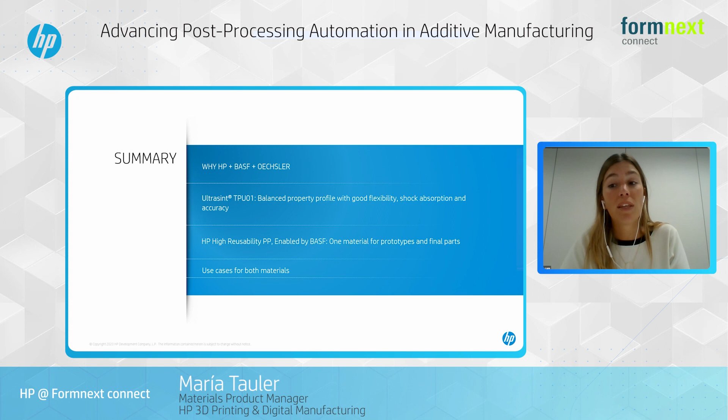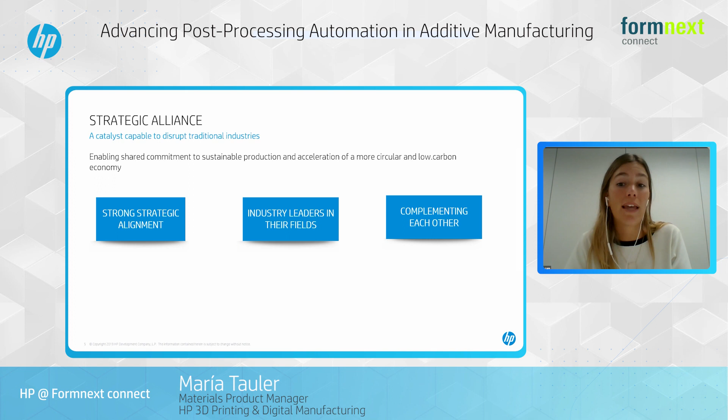So let's just start on the strategic alliance. And today we wanted to share a little bit why these three companies together and what will bring. So the three companies have a strong strategic alignment. They share the same vision to disrupt the industry, and they share the same application focus, especially on medical, on consumer goods, in industrial, in automotive, and also have same risk tolerance and significant investment levels on a long period of time. So these are one of the key points.

Also, the three companies are industry leaders in their field. BASF on the material field, HP on the additive manufacturing processes and printing, and Oechsler in the design and engineering and also additive manufacturing and manufacturing factory operations. The three companies also complement each other to offer an end-to-end view. So each of the partners will bring a different step of the end-to-end process. And all together, what we will be doing is delivering to the end customer the full solution.

The strategic alliance of the three companies is extremely powerful and a catalyst solely capable to disrupt traditional industries, which may be prone to disruption. So with this new strategic alliance, we are enabling a shared commitment to sustainable production and acceleration of a more circular and low carbon economy.

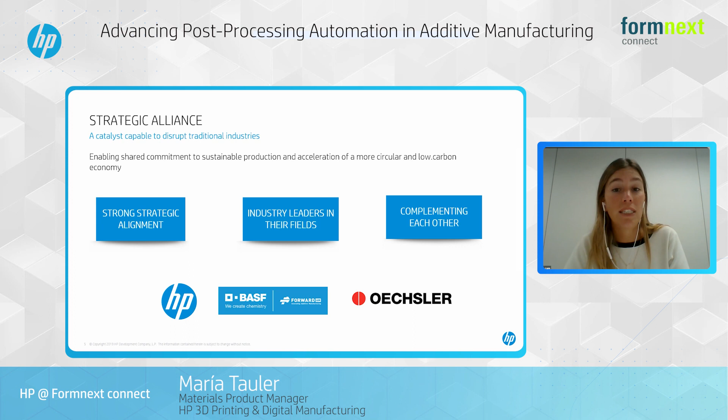With this, we will now move to the TPU material that BASF have developed to work with our 5200 series printer. So what this material will bring to our HP solution, it's a strong and flexible elastomeric material. It especially will enable parts that require shock absorption and that require also energy return and resistance to fatigue.

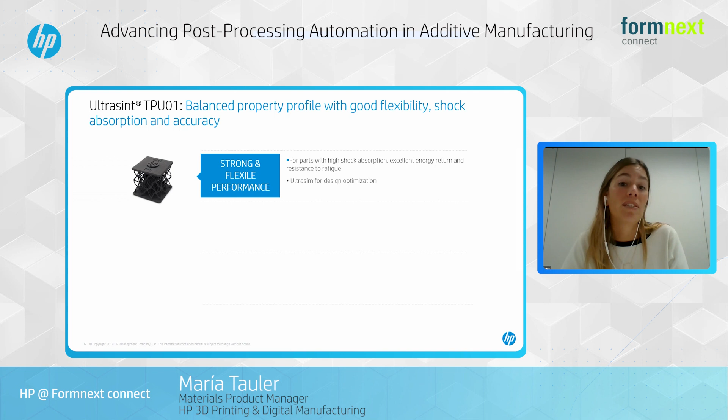Also, another key point that BASF will bring, and that Julia will explain in more detail, is the Ultrasim for design optimization, that especially for this type of parts that require lattices to optimize the performance, this Ultrasim solution will be a key thing. Another key value of this material is the look and feel.

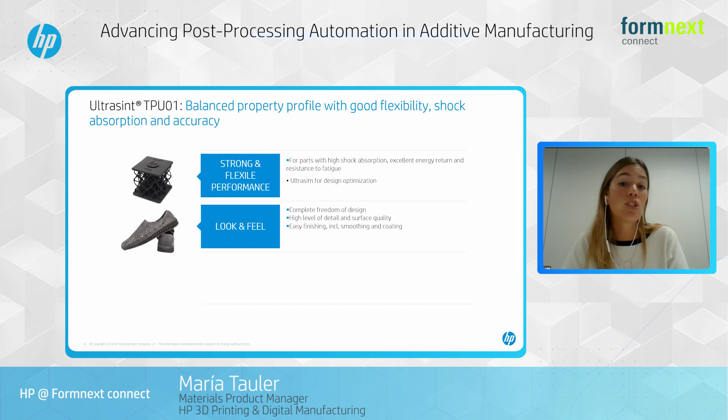A lot of elastomeric materials in the market today have very rough surfaces, and the look and feel, the level of detailing is not very good. So with this TPU together with BASF, we have accomplished to have a very high level of detail, and the surface quality is really, really good. Moreover, it's also very easy to finish, and you can smooth the surface, you can do some coatings that BASF has developed, so the solutions are very wide.

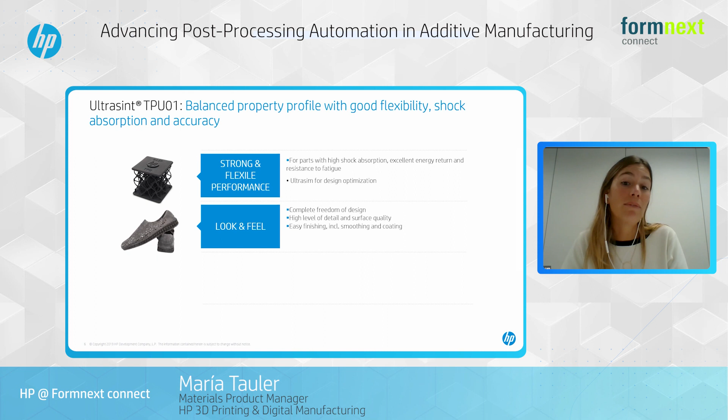And then the third pillar is in the productivity, and this is thanks to the 5200 series printer, that it has a very high productivity, and also the printer itself, we have optimized this printer to have a lot of a high process stability. So from CAD files, you can send the files to the printer, print them, and clean them in less than 24 hours. So it's the fastest time to part in our printer today. And all this also with a very important fact that it's a highly reusable powder, up to 80% of reusability ratio, that this will also have a very cost competitive solution.

Now I will pass it to Julia, and she will explain the applications that we are enabling with this new material.

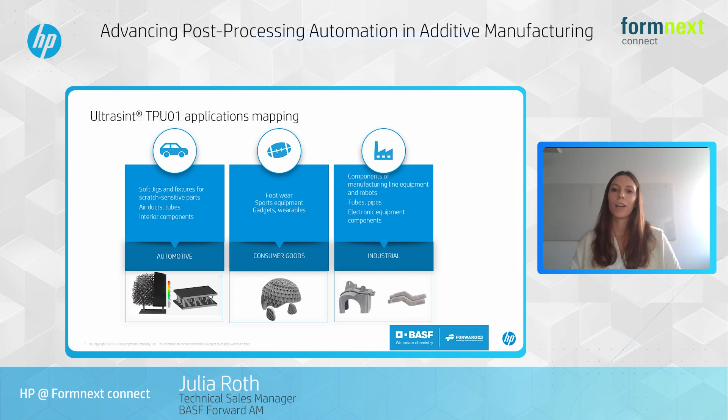To enable your application, BASF offers a broad portfolio of services besides the pure material supply for end-to-end support. This includes support in everything that happens before the printing as well as after the print job has been done.

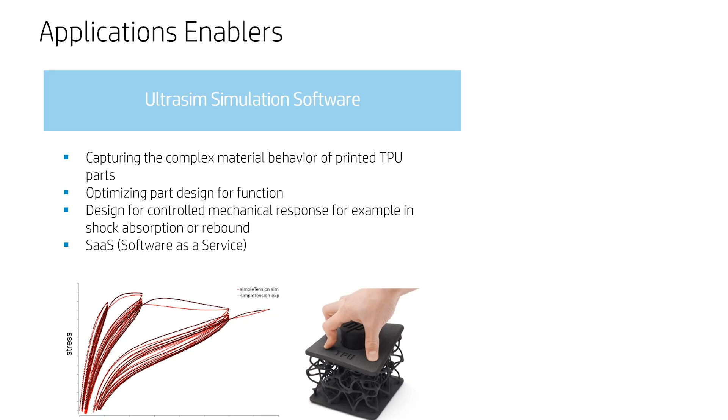On the left side, you can see our BASF UltraSim simulation software. The software is already well known for injection molding applications, but it can also support with the transfer from conventional manufacturing to additive manufacturing. By design and simulation, the component behavior can be adjusted almost at will. For most applications, such as the one that Andreas will be showing later, a part simulation prior to the printing is crucial for a fully functional part that meets all requirements.

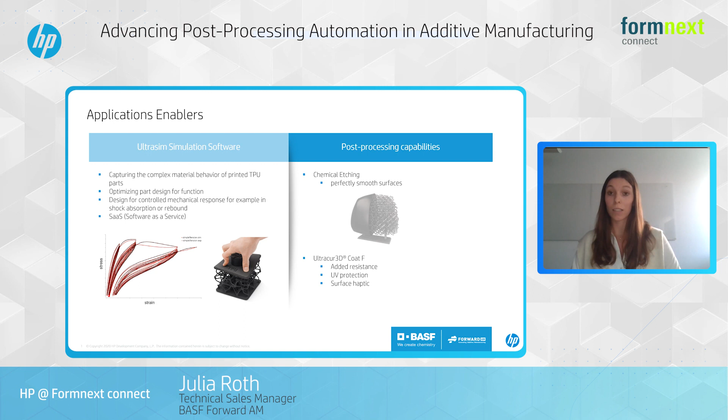On the right side of the slide, you can see our post-processing capabilities, because our solution does not stop with the printed part. For some of the applications we are developing together with HP and Oechsler, an appealing touch and feel is very important. By using chemical etching, we can achieve perfectly smooth surfaces that are desired for many applications, especially if they are visible.

And our Ultracur3D flexible coating does not only beautify your parts, but it can also improve specific performance aspects, such as resistance against chemicals and also abrasion, dirt repellency, and also UV protection.

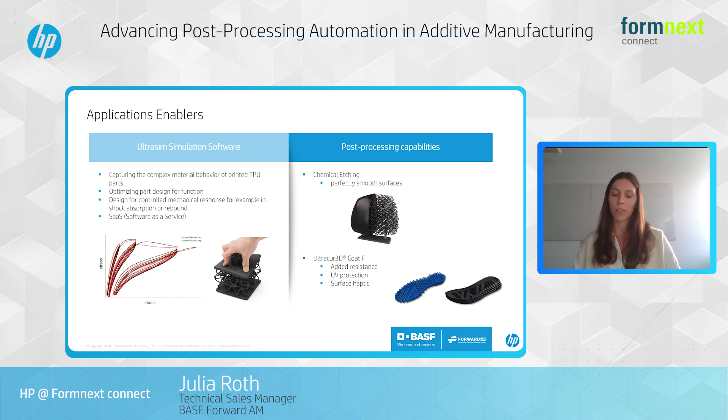Thank you, Julia. Yes, so we introduced this polypropylene material more than 6 months ago already, and this is a very exciting material for us. Polypropylene material in injection molding is a very popular material, so having this now in 3D printing, it's very, very exciting.

What this material will bring, first of all, the most important thing is that it's a real PP, a genuine PP material, and this will help a lot accelerate the design process for a lot of companies that can now prototype and do the final production with the same material. They could use the 3D printing technologies to prototype and then do the injection molding part once the application has scale, but having this same chemistry will really help customers start adopting this new technology.

This material will also bring excellent chemical resistance, and this is also thanks to it being a real PP material. We have done several testing that Julia will share, but we've seen that the results are very, very similar to any polypropylene that you would find in injection molding.

Another key value that this material will bring in additive manufacturing is the welding capability. Now you will be able to weld 3D printed parts with injection molding parts, and before that was very difficult because welding PA12 with injection molded PP is impossible. So you can now do it with PP on both sides, and the welding is very easy. You can use the same processes that you are currently using with your other PPs.

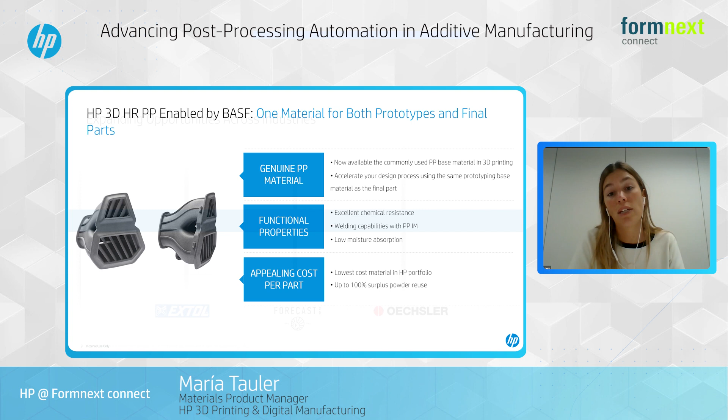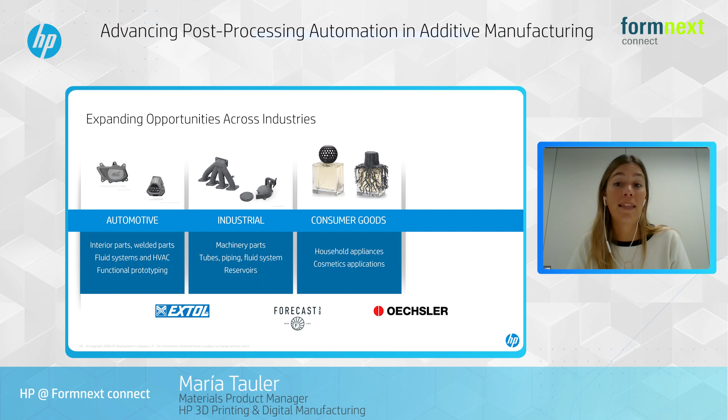Then on consumer goods, there are also two different subsegments that are really interesting for polypropylene material. The household appliances—in traditional also this subsegment is working a lot with polypropylene material. So to be able now also to do the same prototype and do the first ramp-ups of production with this material will also be a key thing for these markets. And then also on the cosmetics applications, like the parts that you are seeing in this image, polypropylene material can also bring a lot of value because it's also a lower cost solution that can help to open this market for the test markets.

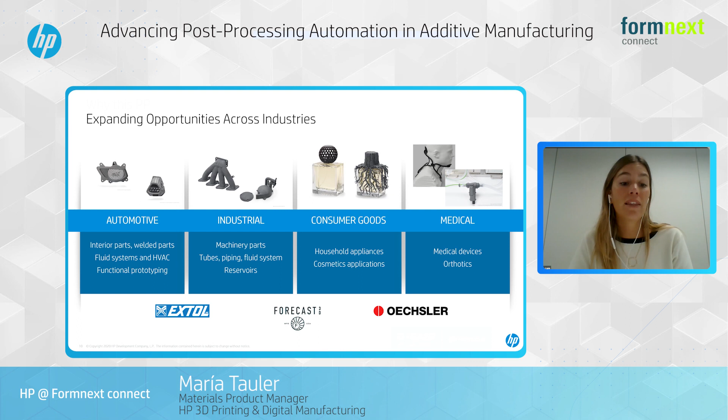And then the fourth is on medical. Here we are seeing a lot of traction from the orthotics customers. These orthotic customers are usually used to working with polypropylene material, so to be able to use the same material but now with a new technology, it's much easier to make this change. Also, one of the key properties this material brings is that once the part is printed, you can heat it to adapt it to the shape of the patient. This is a key thing doctors always suffer with when using other materials, that you cannot do this heating and thus would need to reprint the part again. So with this polypropylene material, you can do what traditional orthotic customers are usually doing with traditional methods, and now you can do the same with this PP material.

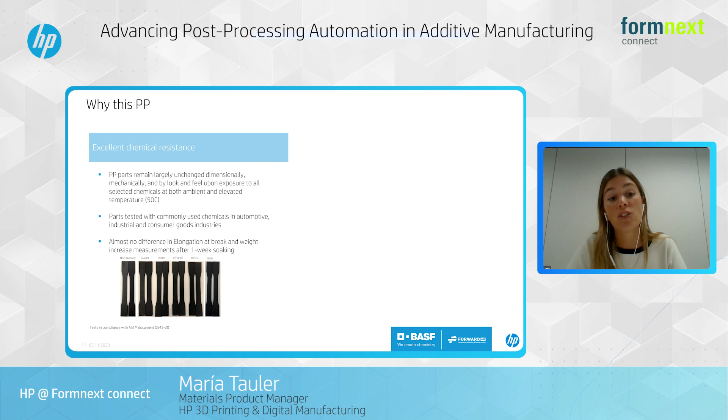So what we wanted to do now is give a little bit more detail on the chemical resistance and the welding capabilities of the material, because these are two of the key properties that this material will have. So now Julia will explain more about that.

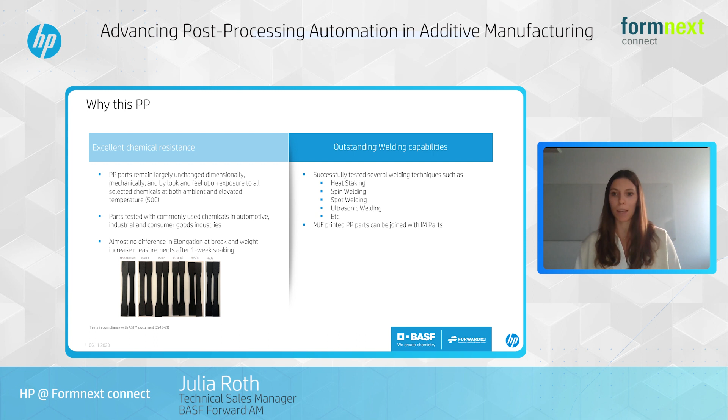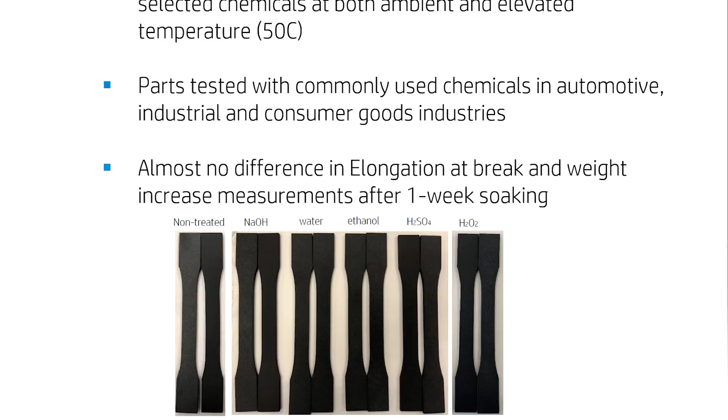Exactly, thank you again, Maria. As Maria was mentioning, two of the main arguments for using PP are the chemical resistance and the welding capabilities. We have tested parts printed in PP by exposing them to various chemicals, such as water, alcohol, but also some acids and other chemicals commonly used in automotive, industrial, or consumer goods industries. As you can see in the picture at the bottom left, the tested parts have shown little or even no change in dimension after testing within those chemicals. Also, the mechanical properties, such as elongation at break, remained mostly unchanged.

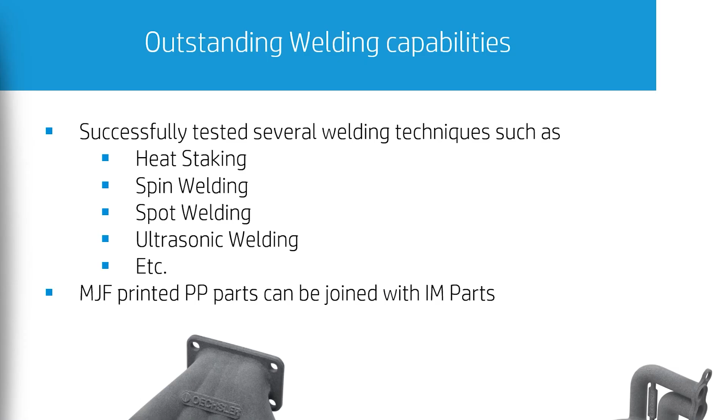Besides the chemical resistance, our polypropylene material also shows excellent welding capabilities. On the slide, you can see a list of some of the welding techniques that we have successfully tested for PP parts. This allows one to join parts made via injection molding with 3D printed parts in PP, which can therefore save a lot of time and money in various applications.

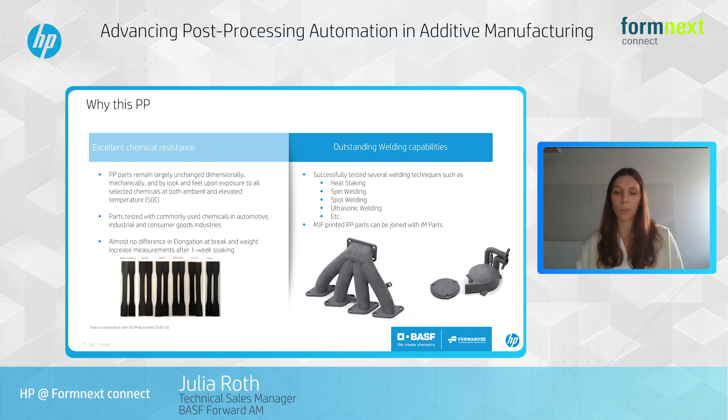Also, when it comes to simulation and post-processing, we offer many solutions such as the coating for our polypropylene as well. Thank you, Julia, for the details on the polypropylene material technical side.

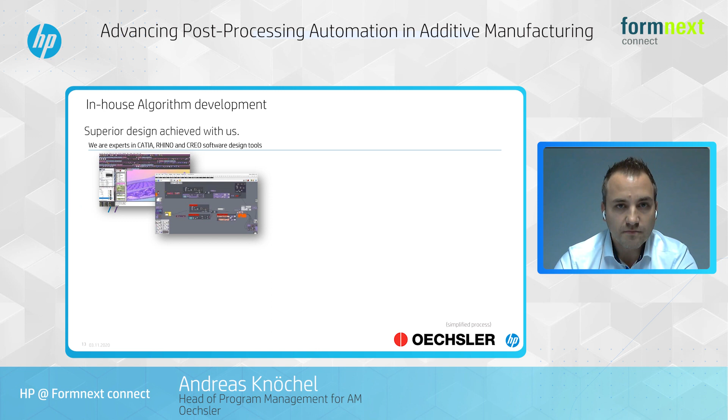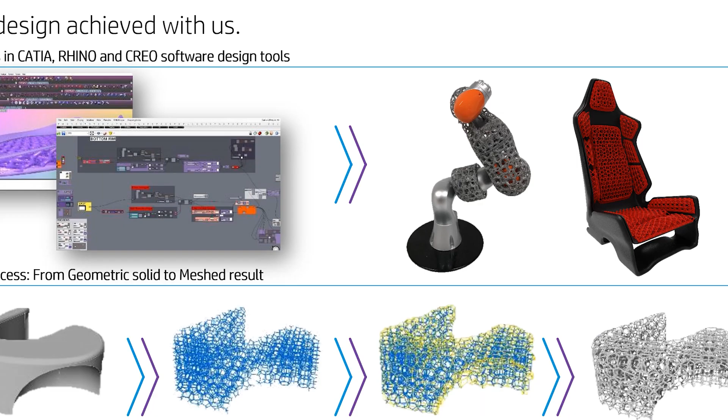Having both of these in hand, we have the capability to design the lattice geometry for our parts, the inner volume as well as the boundary lattice, in a way that we have a very high hit ratio when it comes to prototyping, meaning we do not need to run through a lot of loops and print multiple times. We achieve the specification already with the first print.

Now I would like to show you some of our use cases, already in the field or in development. The first is seating made out of TPU material, also based on lattice design. Why seating? That's one of the biggest questions everyone asks us.

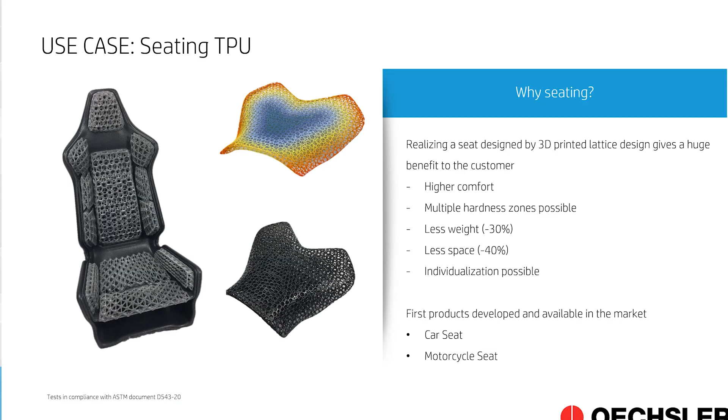By using lattice design for 3D printed cushioning elements, we have a huge benefit to the customer. We bring high comfort to the product. High comfort means we can add, for example, multiple hardness zones within one part. On a car seat, the backrest can be way different from the seating area, or even within a tiny spot—just having your shoulders hitting the comfort element, you can have it softer or harder depending on your needs.

On top of that, with comfort elements we can also achieve less weight in the component compared to regular foam, and less space. Why less space? For example, regular seating might need around 10 centimeters of foam cushioning, but we can achieve the same or even better comfort and hardness zones with only 4 to 5 centimeters. So almost 50% can be saved that way.

Last but not least, if needed, we can very easily achieve individualization in the seating, so we can make it more comfortable for heavier or lighter persons sitting on the same looking seat.

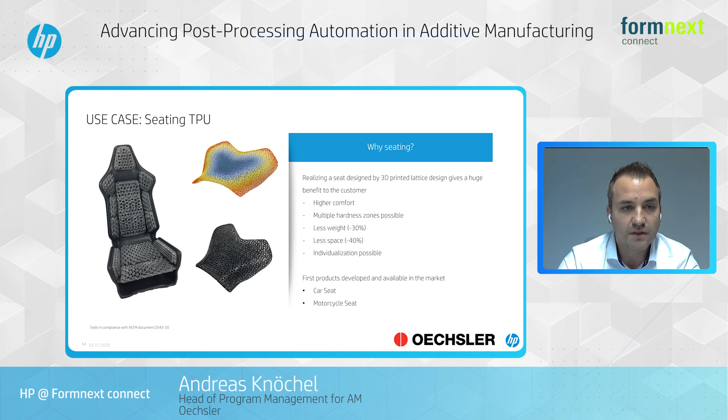What you see on the left pictures, one is a model, one is a real part. The seating shown is our showcase model, where we can demonstrate pretty easily the capabilities of lattice—you see a lot of lattice elements in the seating, cushioning, and headrests. This is already achieved in serially available car seats. What you see on the right side are two pictures; the lower one is the real part.

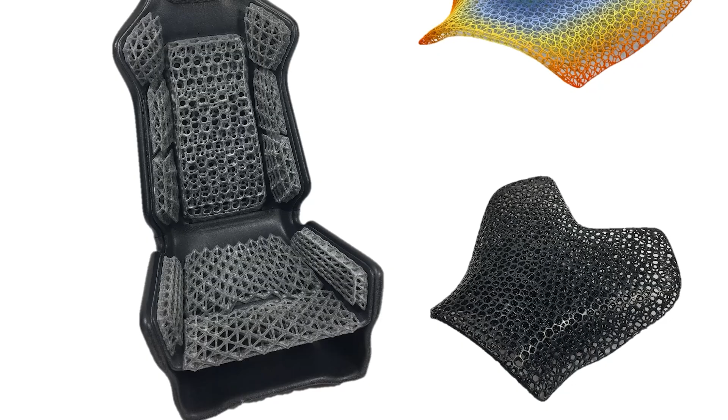It is a motorcycle seat for an available motorcycle. In the top picture, you see the same part in simulation and development stage. You see different hardnesses going all over the surface without any restrictions, starting in the middle from very soft to the outer boundary where it ends up in a hard zone. There are no steps at all, so as a customer you would not feel any steps—it's a very smooth transition from soft to hard. Both versions, as I mentioned, we are really moving toward production in a bigger way.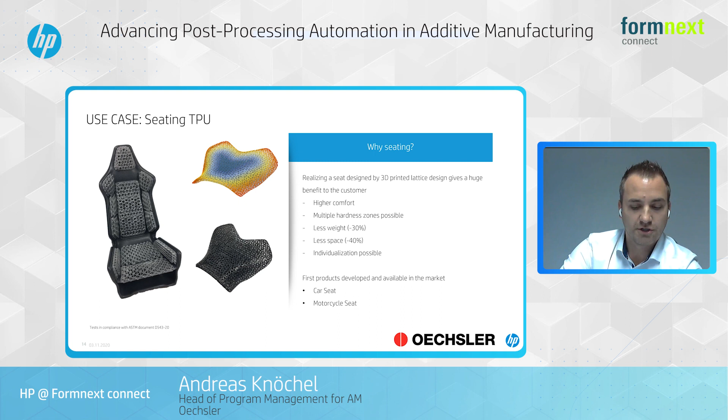In the second use case, what do you see? We call it RoboSkin, also made out of TPU and finished with the post-processing already explained.

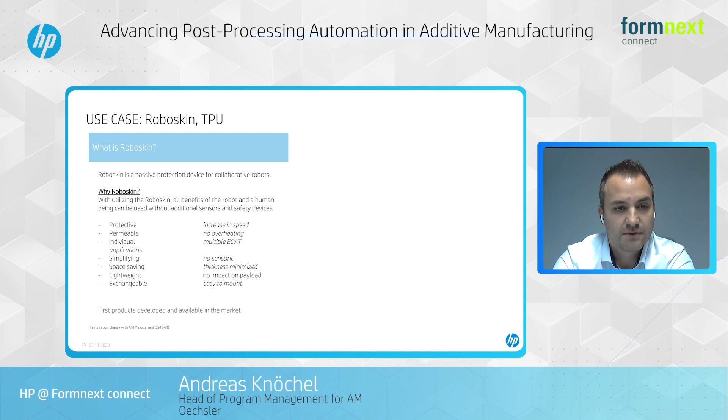What is the RoboSkin? It is a passive protection device for our collaborative robots. Collaborative robots still need something to protect them. As of now, if you use a collaborative robot, you still have to go pretty slow in the special areas where the robot interacts with the human worker. To overcome this limitation, you can add cushioning so the speed, for example, can be increased—that's the protective function. On top of that, if you put such a protective function on your hard metal skin, you cannot just do it with foam, because the robot would overheat very, very fast.

You can imagine with our lattice structure, which is an open mesh structure, it is permeable, meaning the heat can go out and you don't have overheating.

Not only looking into the robot, you also have the unique end-of-arm tools, which could be different from application to application. By using the technology of 3D printing with our lattice structure and smooth structure, we are very flexible to adapt the RoboSkin to a lot of different tools, meaning the geometry can be different from tool to tool or from customer to customer, which is not an issue.

Simplifying, yes, also that system is simplifying because you do not need to add any sensors. Sure, you could achieve the same function by adding sensors, but it is way more cost intensive, plus it's not as simple to set up as you would just add a skin.

As well as the lightweight function, you also have space saving, meaning the thickness is very minimal. You do not add a lot of material to your robot. And as I mentioned, with the lightweight, you don't have any impact on the payload. Yes, we are adding a couple of grams, but the weight is so low that the robot can almost use its full payload.

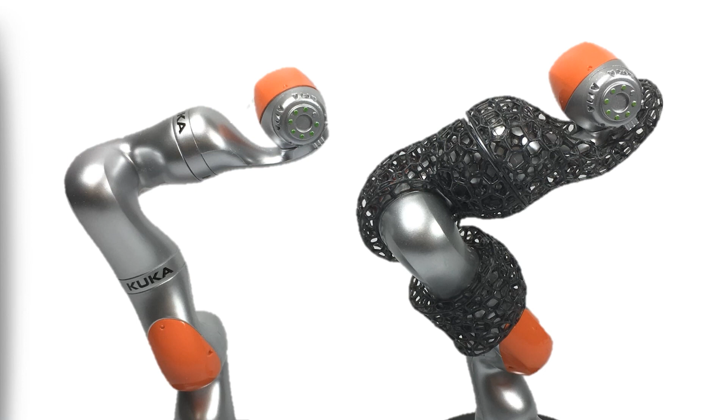And as mentioned, we are already using that one. It is in the market. The first RoboSkin itself we are using in this case on a KUKA, the iiwa 14. Okay, coming to the third use case, we are coming to the polypropylene technical parts.

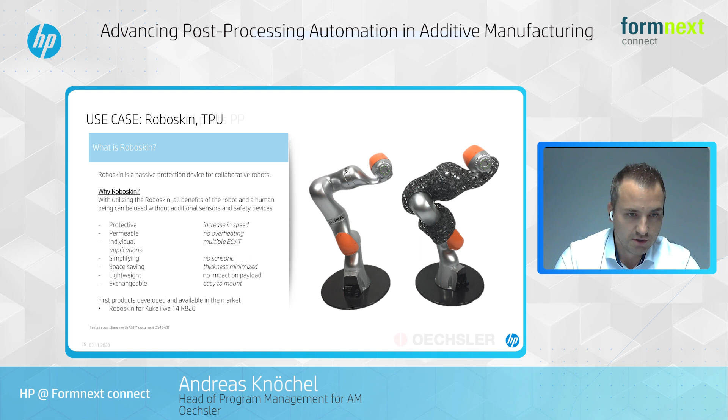What you see here are some manifolds, some piping, including a housing. By using the PP, the polypropylene material, on the one hand, we are using the 3D technology to make the impossible design possible, especially in scaled mass production.

But when it comes down to fluid pipings, for example, what you see on the left side, we definitely have the big advantage of chemical resistance against fluids, against solvents, for example.

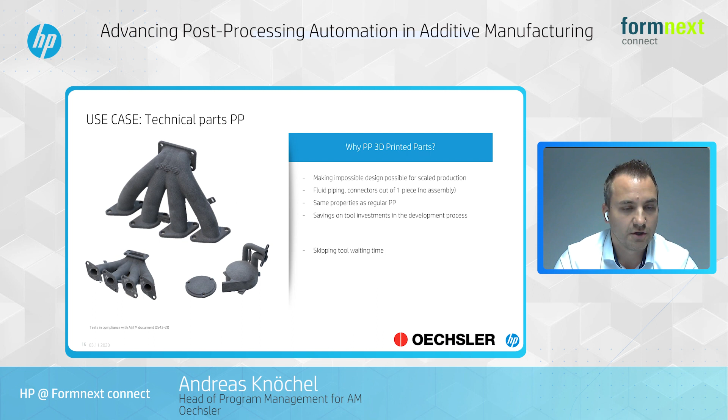But also, even if there is on some parts the possibility to produce out of one piece, especially on housing, like you see on the lower right picture, the housing still does have a cover. We can use the very good advantage of the welding capabilities, meaning even there, without using any special adhesives or even screws, we can mount the two components together, which, as mentioned up front, was not possible until now.

By going for the PP, which does have almost the same technical properties as regular polypropylene, we definitely are also in the position to skip for our customers the tool waiting time.

If you go, for example, for simpler parts, meaning by already being able to produce high quality grade polypropylene 3D printed parts, we can print, for example, the first 6 months the parts directly out of the HP printer and only switch to the simplest geometry parts to injection molding afterwards, after 6, 7, 8 months.

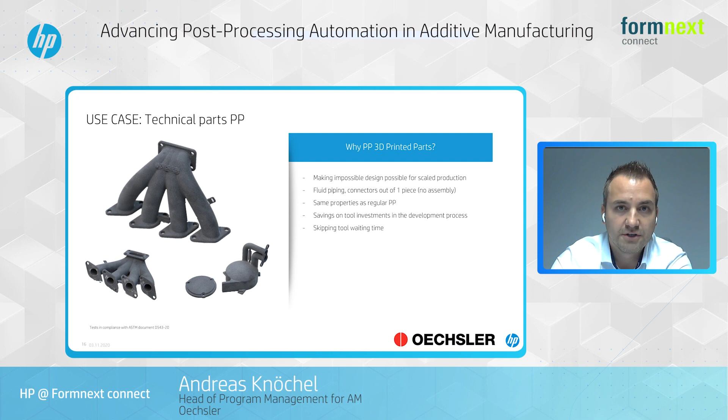Sure, here we definitely have a big time advantage for our customers, and they don't need to wait for parts for serial production. And now, as I showed you a couple of use cases we are really dealing with all day long, I want to give you a short outlook to the future.

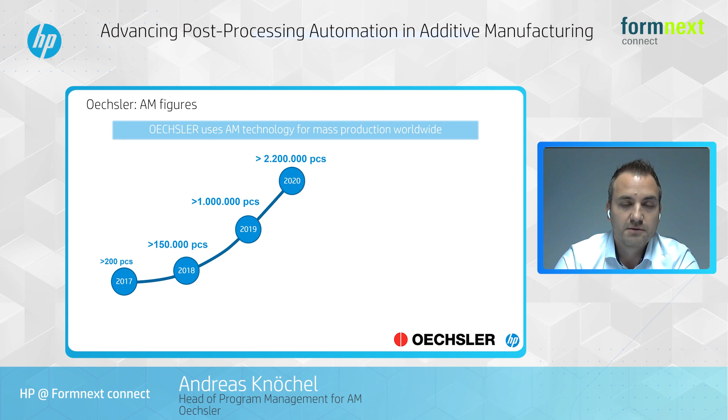For us at Oechsler, we're working together with HP and BASF for quite a long time. And for us, 3D printing is really mass production, not in the future. Just have a look at our 2020 numbers. We produced more than 2.2 million pieces already, sure, with quite a lot of technologies, but we will definitely ramp up over the next couple of years and scale the TPU as well as the PP business with HP and BASF.

We have right now 200 printers already in our fleet, and we are ramping up over the next couple of years for more than double of that.